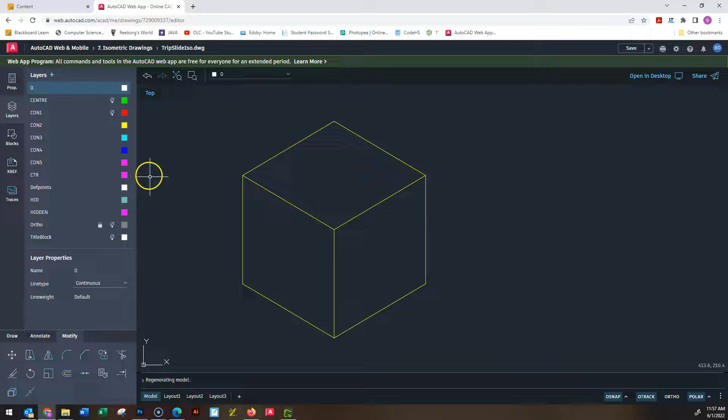I'm going to replicate my object right now in white. Actually, I want to keep that yellow box. I'm thinking on the fly here. I'm going to draw a cube, and my goal is going to be to round all the corners of this cube, so maybe it just looks like a six-sided die or something with rounded corners instead of sharp corners.

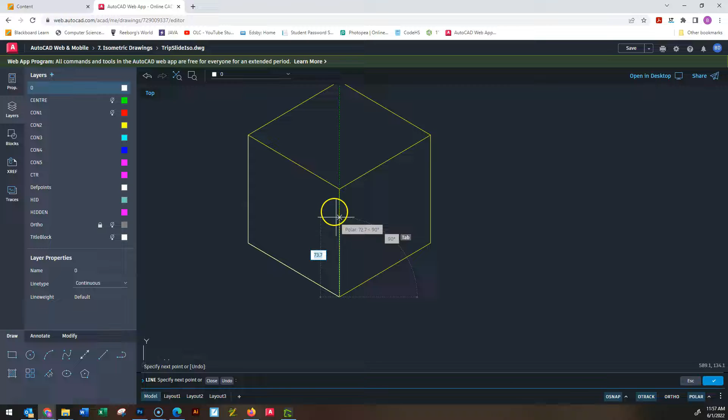Okay, so I'm just going to trace all these in white. Everything behind there is going to be hidden. I may decide to draw some construction lines back here to help me, but I'm not sure if I need them yet. Okay, so let's look.

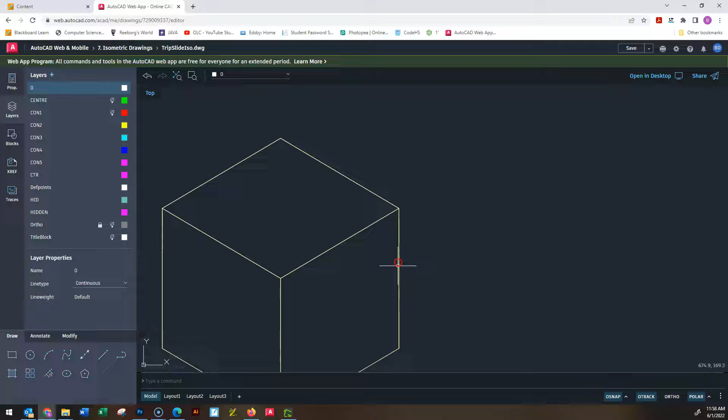Now we're going to be rounding corners. These are 100, I'm just picking randomly. I'm going to put a 20 radius fillet. Your fillets are going to be in radii because they are not full circles, so that is an important distinction. I'm going to go 20R fillets because that's the way you would see them on the drawing. Or, sometimes they're called rounds, but fillets is the proper term.

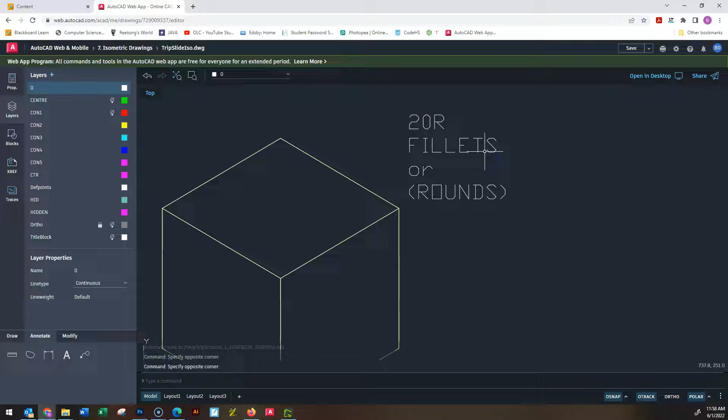And I'll just put 10. See how big that lettering is. Okay, so I'm just writing this to demonstrate that this is going to be a 20 radius fillet.

Okay, so let's get to work here. We know we're going to need isometric circles. I also know instead of just the top one, I'm going to need these two as well. So I'm going to go to my blocks and bring out this isometric circle.

So I'm going to insert here. Okay, I'm going to insert that there. And then I'm also going to make a couple copies and rotate them because I know I'm going to need them. So I'm going to CO copy from the center of this object down, one there, one there.

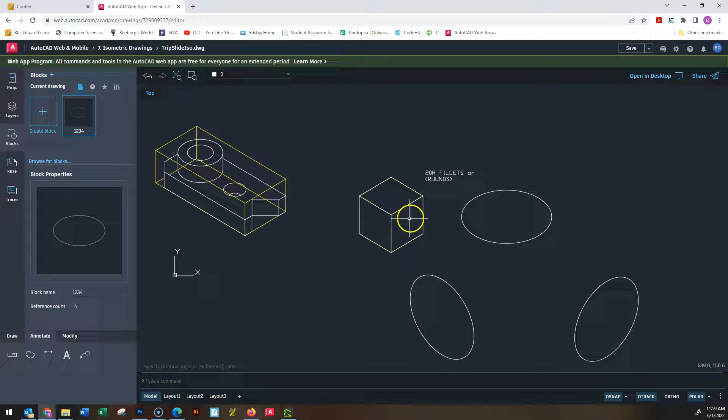So I've got top, left face, right face, and I'm going to need them all for this because I'm rounding every single edge.

All right, now how do we do fillets? Fillets are actually a little easier than scaling for circles. There's a couple of little tricks you can do. Whenever you're filleting a corner, what you want to do is look at what the radius of the fillet is supposed to be, and you want to make a center point somewhere about here that you're going to use for your fillet.

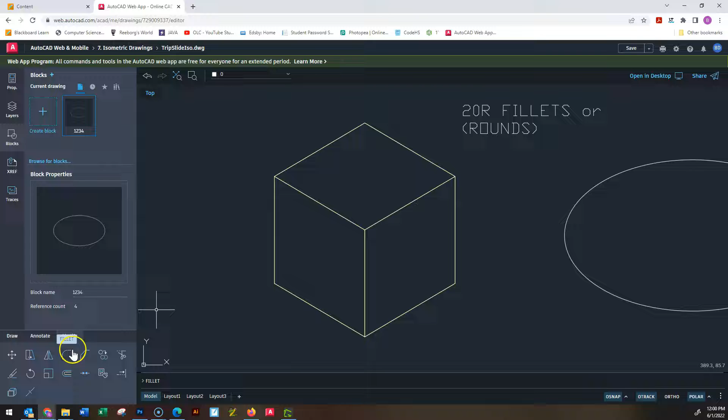You cannot use the fillet tool. So in Modify, we've been using the fillet tool, but you cannot use that for isometrics. That only works in orthographics. It'll fillet it, but it will not be the correct fillet. So make sure that you're using isometric circles or ellipses.

So our 20R fillets, let's draw some of these guidelines to help us out. I'll do them in light blue, actually purple, really easy to see. So I'm just going to go to my draw tool. If it's a 20R fillet, that means from each corner you just go along the line 20.

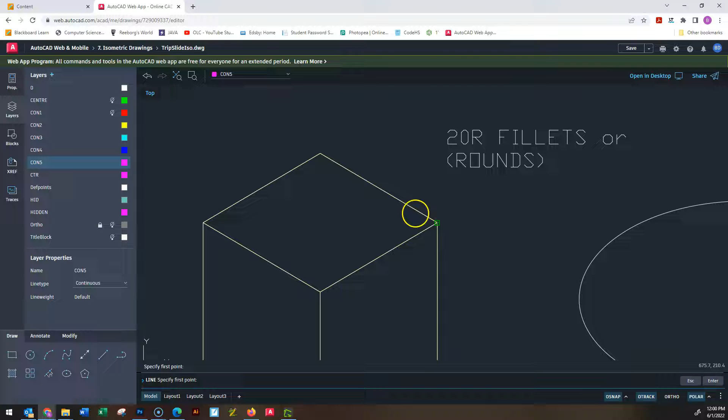And then, this is easy because it's just at a 30-degree angle, and then 20 back this way. That will give you the center point for this particular fillet, and you can do that at every corner. So that is 20, 20 this way, just making sure that you're on those 30-degree angles.

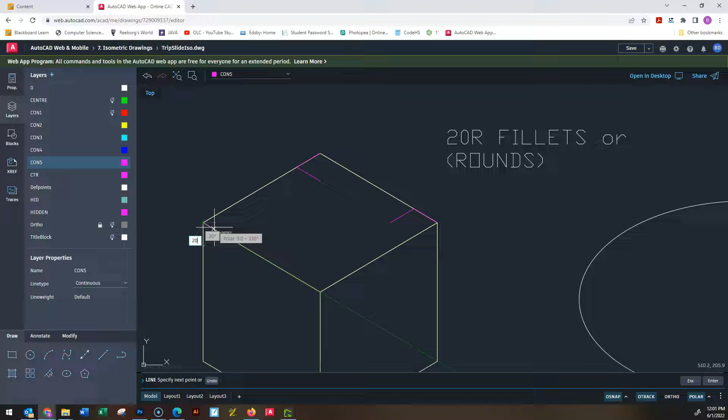Okay, and now that I've done this a couple times, one more maybe. Do this one, 20 this way. Get that corner right there, 20. Okay, and after you've done a couple, you can start copying them down and whatnot. I can actually copy this one, CO from this corner.

And, no, actually, it doesn't help me. I don't know what I was thinking there. So that line. Just look at the other ones. 20 and 20. All right.

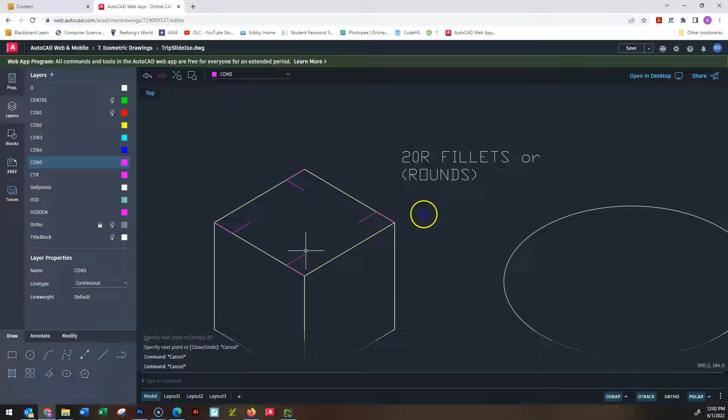Now that I have drawn one on every corner, I can actually hold down the Shift key, click, click, click, grab them all at once. This will save you time. Grab them all, because they're going to match up at the bottom, right? So grab these. Then I'll just copy them.

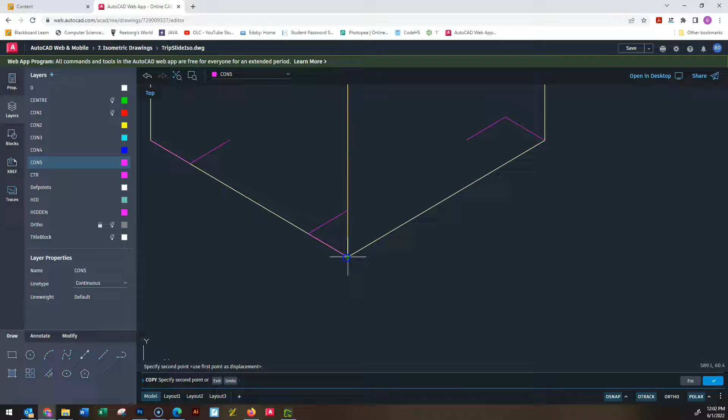CO. And just make sure you grab a good point. That corner will be nice. And then copy them straight down. And then you got the bottom ones as well, right? So the end of those purple lines represent where that round is going to start. It's going to start here, and it's going to end up in the same spot over there.

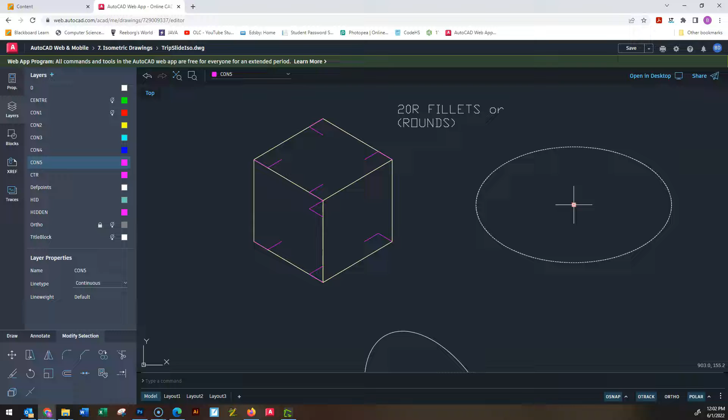Okay, now how do we do this? I believe you could still do it the easy way with copy and just dragging. So what I'm going to do here is I'm going to take my isometric circle, and instead of scaling it, I'm going to copy it from the center, and I'm going to place that here. Okay, way too big, right? Clearly way too big. Okay, now here's how we can make a shortcut though.

If I grab my circle and now I scale it, so SC scale, I can scale it from this point, and then look what happens when I go out to, okay, now what was this supposed to be, 20, right? So oh, maybe it won't. I was really hoping it would snap there, so I guess it's not perfect. Yeah. Because where I need it is right there, but you can't ever guess, right? You can never guess when you're doing drafting.

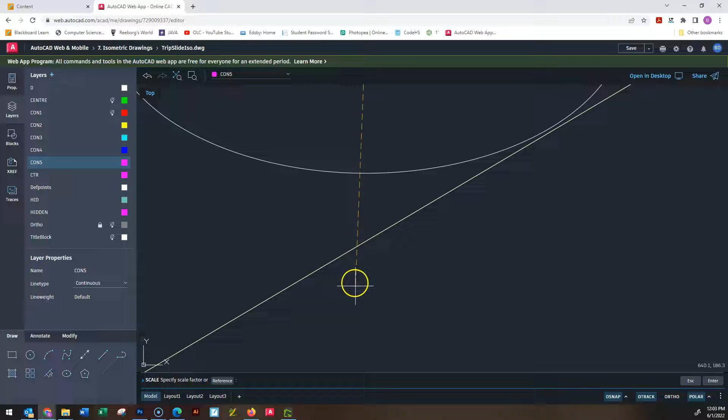Okay. Oh, that looks like it's touching, but when you zoom in, it won't be touching. It'll be close, but there'll still be a little gap in there, and you can get closer and closer, but really you're still just guessing. But luckily enough, I do know exactly what the radius of this is. The radius of this is 20. So from that center point, you still need that center point. So you still need to draw those purple lines. However, from that center point, I need to scale this version.

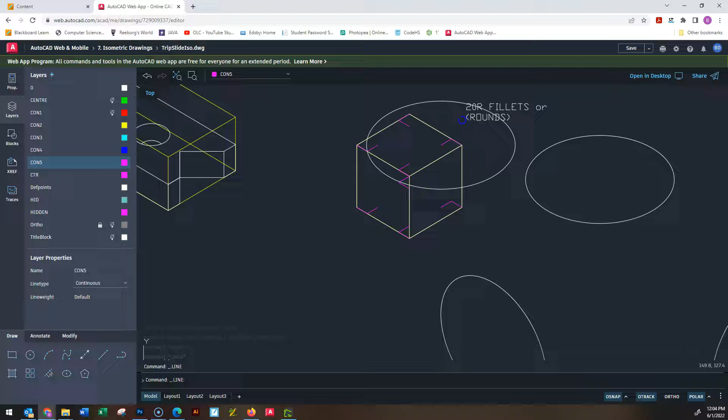The original was, I got to guess now, was the original 100 in diameter or 100 in radius? I believe it was 100 in radius. Let me just measure it quick. From the center point of this, it needs to be 100 in any 30-degree angle. It is 100. So this needs to be 20. So 20% of 100, right?

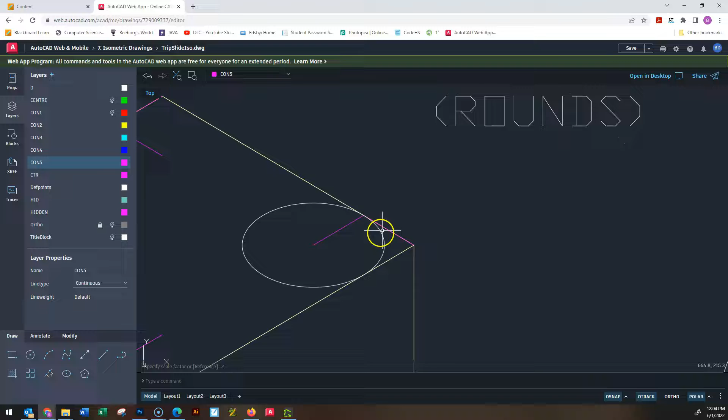0.2. So I'll grab this, I'll scale it after it's already in place, and then I just got to make sure that I'm at a 30-degree angle, and then I need to type decimal 2 because that's 20%. Okay, so decimal 2, there we go, and look, perfect. Once you've got that one, because all of the rounds and all the fillets are 20, you don't need to actually make any more because you can just take this and go copy, and then copy it there. Look at that. It's going to work.

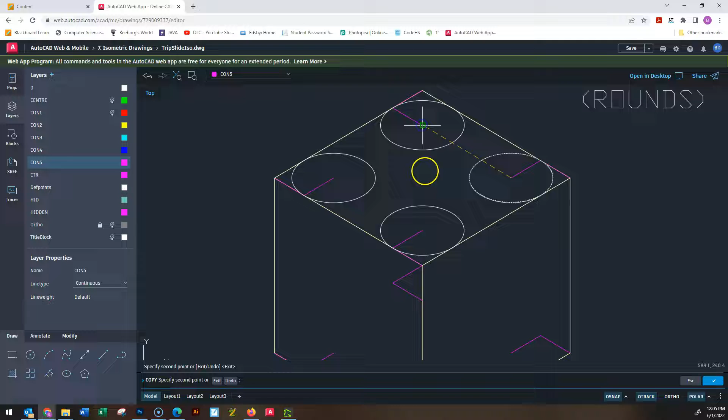Anything that's got that top face is going to work perfectly, as long as you've got the center points. There you go. And you can do the bottom too. It will match up perfectly with any of these corners. Now I didn't draw the back one because that's hidden, but I do have it up top there. Okay, so that's great. Now that will give us the round for this section. Let's just say that I'm not going to do this round. No, let's do that round too.

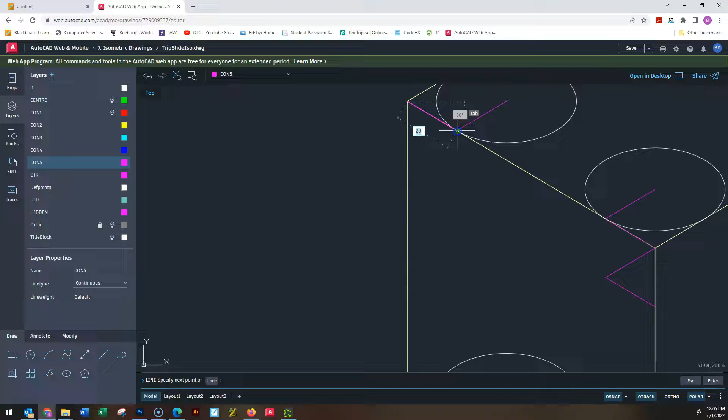Okay, so that's this round then, right? But the same principle applies. It's 20. So if I'm going to draw the lines for, let's say, this face, same principle. I need to go down 20 along that vertical line or horizontal or this line. It doesn't matter. I can go to there because I've already got that point. I know this intersection right here is 20 in already, so I just need to go down 20.

Okay, and then I can copy that. CO, because that's going to be the exact same as this corner. Right? It should match up with that box down there. And then I'll just copy it from the bottom here. CO from the bottom this time because I needed to go up 20 from here. There we go. And up 20 from here.

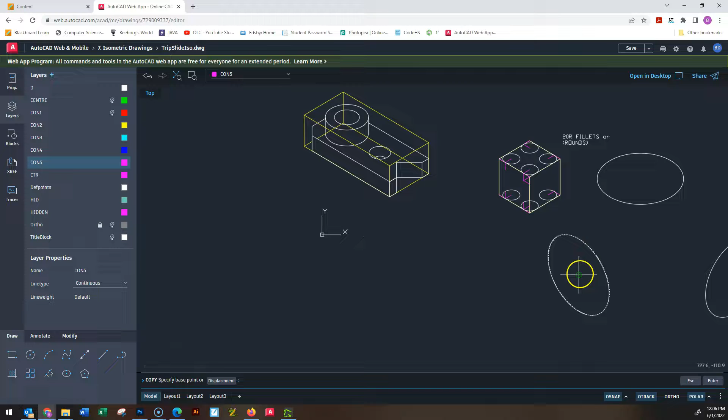Okay, so let's take a look at this left face. That would be this isometric circle, exact same process. So let's make a copy of it. So CO. I'm going to put it there. Okay, now I know I need to scale this to 20%, so I'm going to select that. Scale it, SC. Where do I want to scale it from? I want to scale it from the center. And how big do I want to make it? Decimal 2. 20% as big. Okay, so now we've got the one that sits on this side.

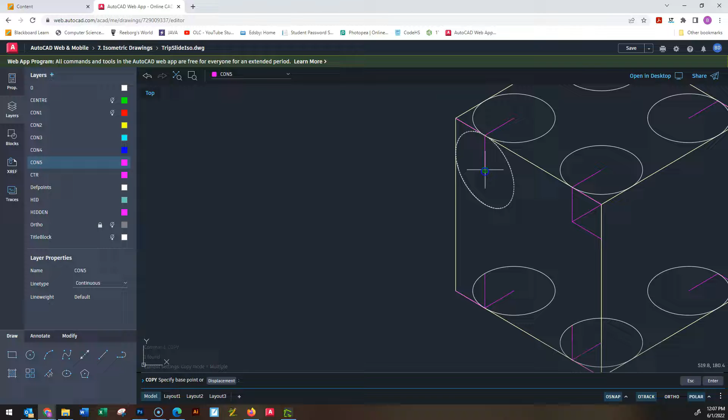Now I can copy that one. So copy to there, and to there, and to there. Okay, now I've got the places that I'm going to round here, and we might as well do this last face while we're at it. So once again, 20. 20. Well, I know it's where this circle hits, so I can just find that intersection point. Go up 20.

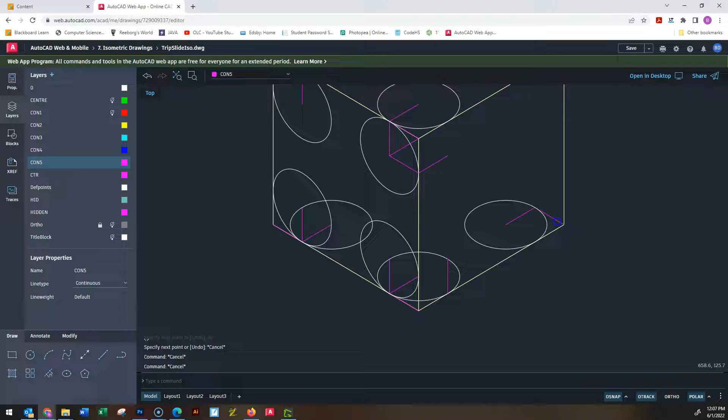It's going to be in the exact same spot as this one right there. And then this one needs to go down 20, and then I should have all the circles. Okay, it looks a little weird right now, but it'll make sense in a second.

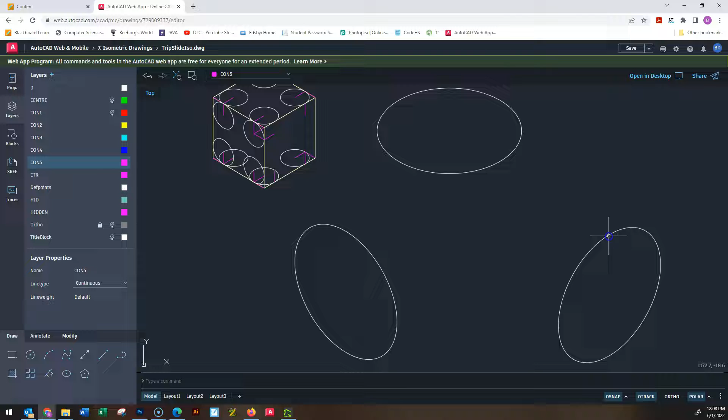Okay, so now I've got to grab the one that fits on this right face. So copy that, CO, grab it from the middle, put it on any one of these midpoints, yeah, center midpoints, isometric center midpoints. Grab it, scale it, SC, scale it from the center, and then it was 0.2, make it 20% of the size that it started at.

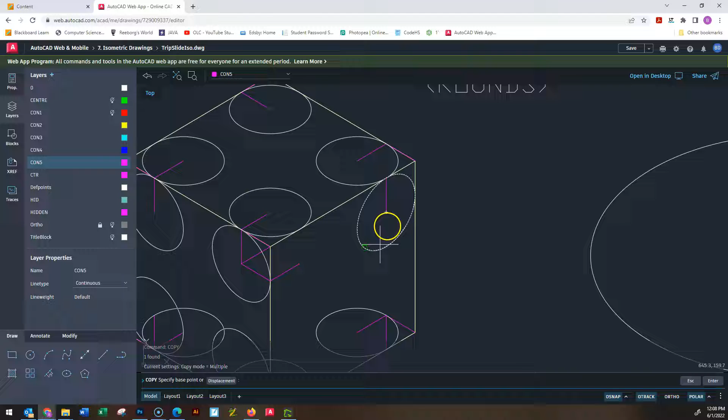And then once you've done that, you can go copy. And paste, paste, paste. Okay, so it looks wonky, but all our circles are actually in the right place, and we can start trimming. So what do we trim? Well, these corners are going to disappear because this object is rounded, right? So what we need to do is we need to make liberal use of our trim tool now.

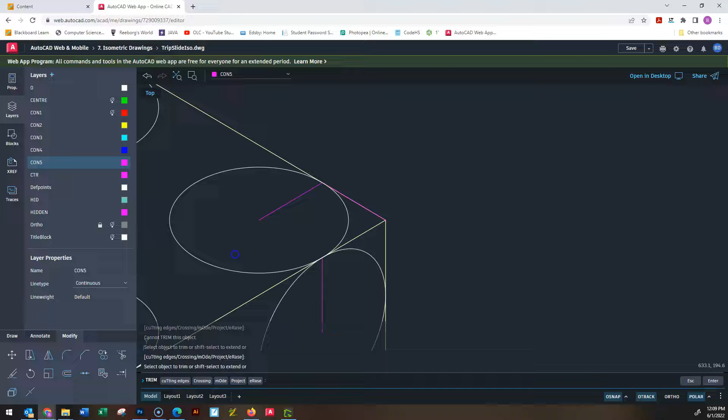This is inside the object. We don't need anything there. That's gone. Oh, forgot one important thing that I should have done at the beginning before I started copying. It's not going to hurt us too much. I just need to grab every single circle that I drew, holding down the shift key. If you do this with the very first one before you copy it, then you don't have to do this step.

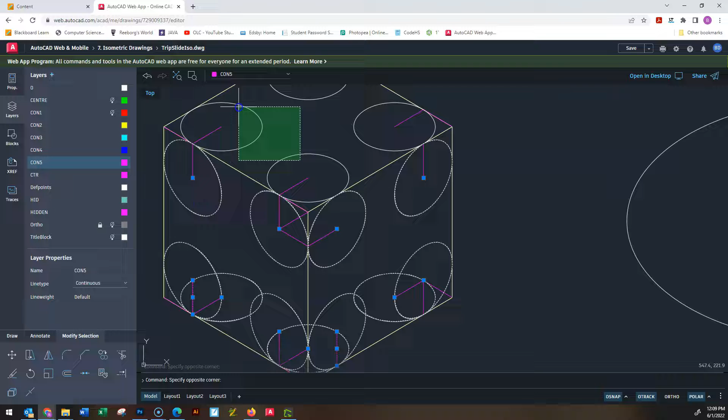And the mistake I made is I forgot to explode them, so I can't trim anything until I explode all of these blocks. So now I've got them all selected, go down to my explode tool. Now they're all exploded. Oh, it says we're not able to explode. That's weird. But that looks exploded to me. I might have accidentally grabbed a line that you can't explode, but it looks like all of these have been exploded. You can tell because now they've got a center and they've also got these 4 marks on the circumference.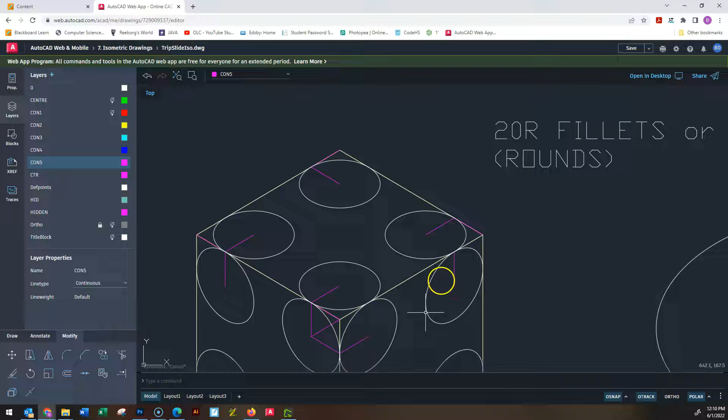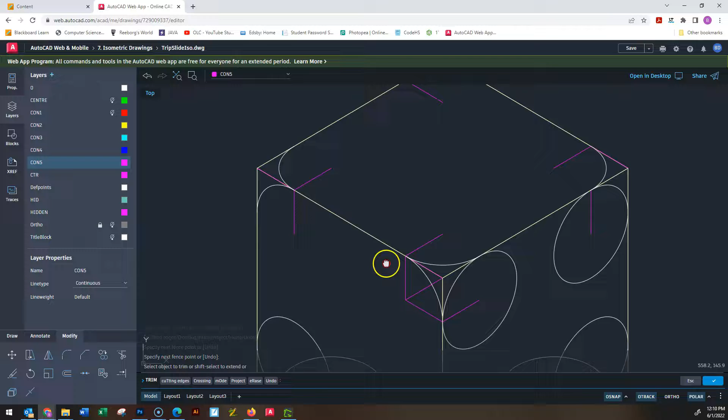Okay, so let's make liberal use of that trim tool. What are we trimming? Anything that looks like it's not going to be part of the object. So that's got to go, that's got to go, that's got to go, that's got to go. Okay, but you're leaving the rounded sections, right? So what it's doing is it's trimming every part that it sees between where it intersects here and where it intersects there, which is good. That's what we want. So I want to get rid of those 2. And we want to get rid of these, all those, this. Don't need any of these lines anymore.

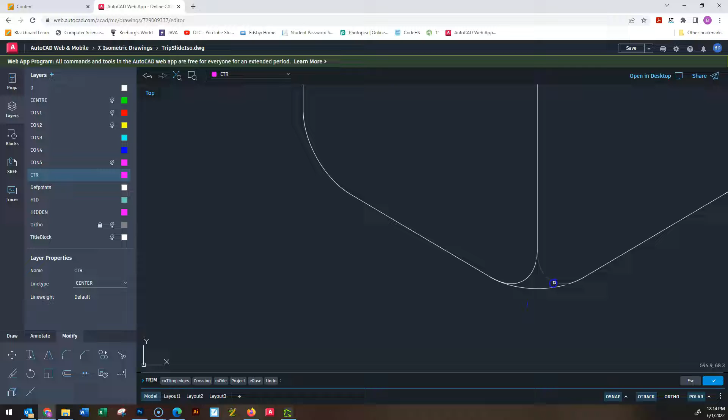Okay, so just this part right here, it looks a bit weird as a shape, but you just got to imagine that it was a corner, and maybe you just took sandpaper, or you took this to a belt sander and just sanded off the corner. It would have sort of that rounded shape in more than one direction.

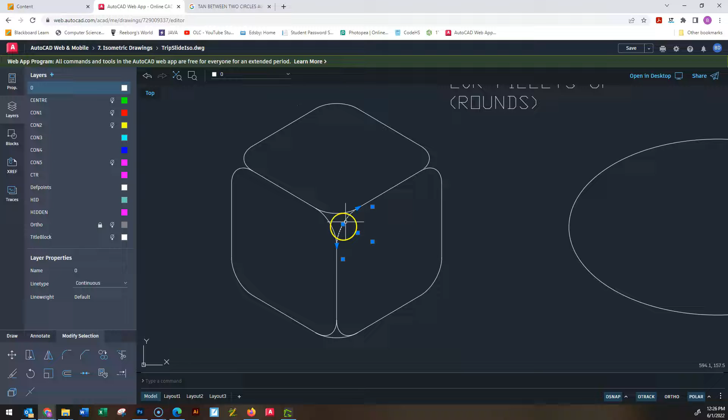Okay, so the last thing we have to do on this is we got to kind of fill in these corners here because it just looks weird. It looks like there's a piece of plywood standing up there, and then another one on the top, and then there's a gap of air, but there isn't. So when you're filling in gaps on objects that kind of look like this, what you might want to do is just grab a corner that you know is perfect, it has perfect isometric measurement, and then just bring it back up there, and it'll perfectly fill that gap and be mathematically accurate.

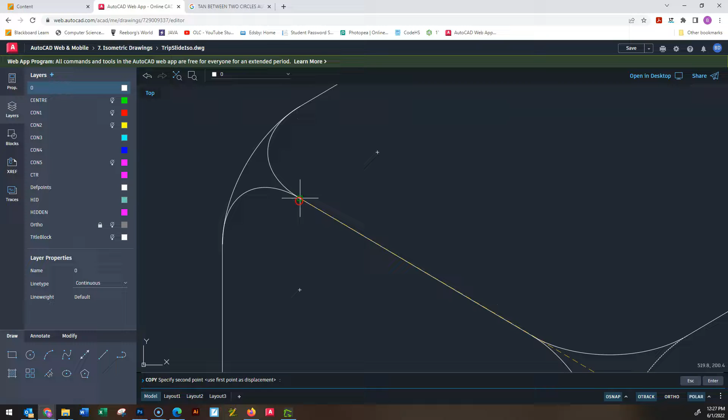So if I copy this existing curve, just make sure you take the right curve from the right face, because remember, we're looking at what would the back face curve look like, the one that's hidden. It's going to be the same angle as this one, right? So let's take this, and if there were a back to this object, you can just see the very corner of it, and once you get it to that same point, I mean, this is just the vertical point from

the center, right? Straight up, and then right there, then you can see that is the very back corner, and then the gap is where it's been sanded off, and then you got to do the same thing with this one right here, and you just got to grab the opposing curve, copy that, and bring that back.

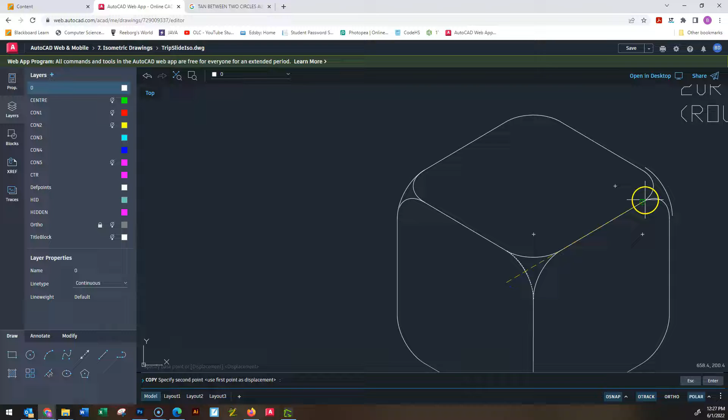Now you have an isometric representation of, say, a die or something like that. I could put 3 isometric circles. It could be the 3 of the die, and also all the corners around it. And these ones are sort of double rounded because they're rounded on the top section and they're rounded on the bottom.

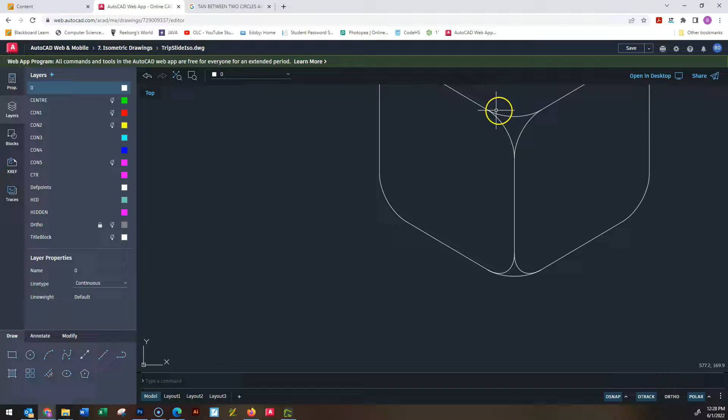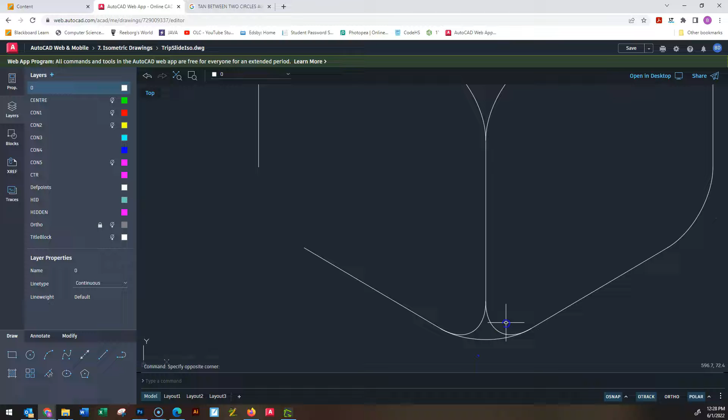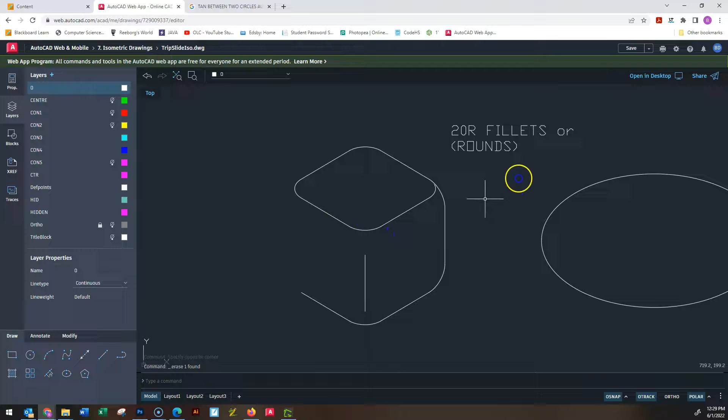Just a quick idea of what that might look like if you didn't do these top rounds. If you just wanted it rounded, say on 2 faces, on the top and the bottom, then it would look a little different. It would look something like this. Just get rid of these ones. I've just basically got to fix the corners. You'll see what I'm getting at here pretty quickly. Okay, so this would be the rounded edge, and rounded edge, and then this one, rounded edge as well.

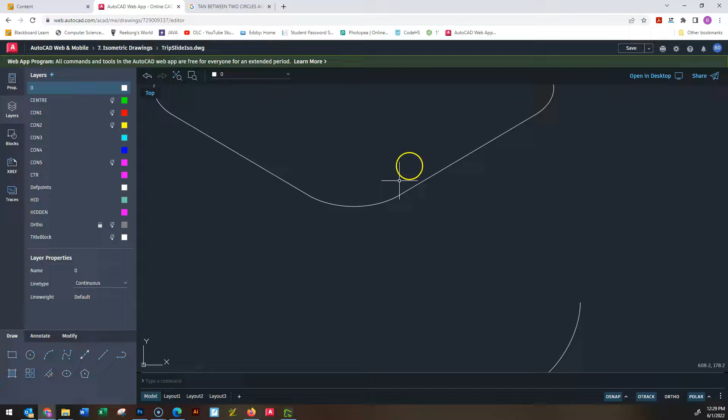So basically we want a shape like this, sort of rounded only on the top face, and then these other 2 faces aren't going to be rounded. Now all I'm going to do is join up the lines. When you are representing a rounded corner, or filleted corner, this is where you're going to use an angle. So you go from the center point of that round, and then it is 30 degrees, so 150, 180 minus 30, to there, and then straight down.

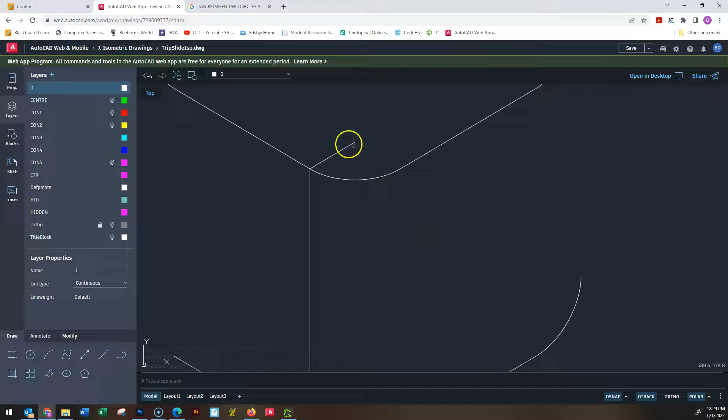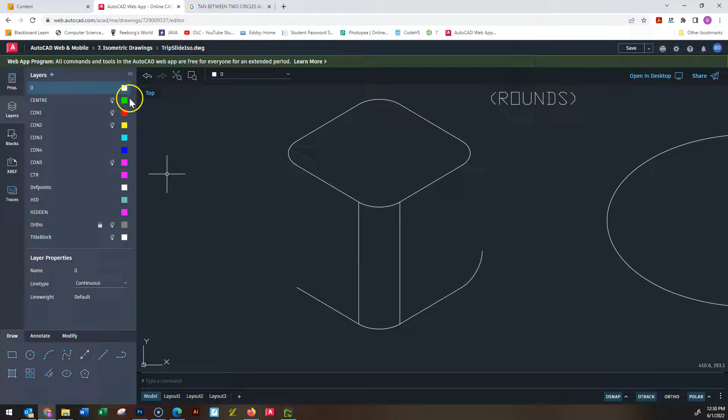And so you're going to see the same thing from here. You've got that same 30-degree angle, and then right down to where you hit the ground, should be vertical. And that just sort of accentuates for the user that it is actually a curved section. It looks a little weird if you don't include these lines. And then this would be the same process. You'll notice that the actual bend of these ones is different than the bends of the ones on the top and the bottom. That's just part of the way isometrics work. They look different based on different perspectives, but here we do the same thing.

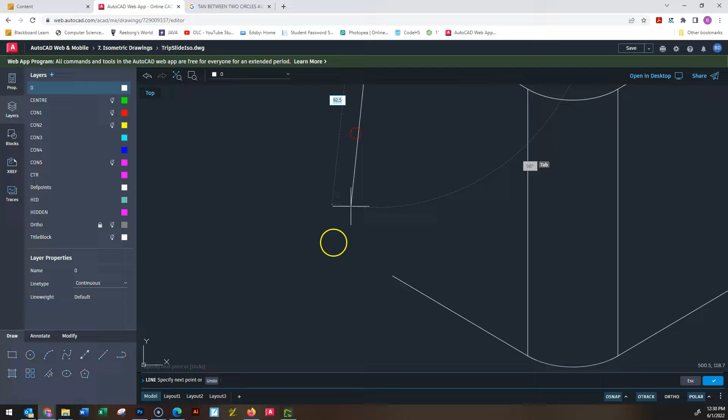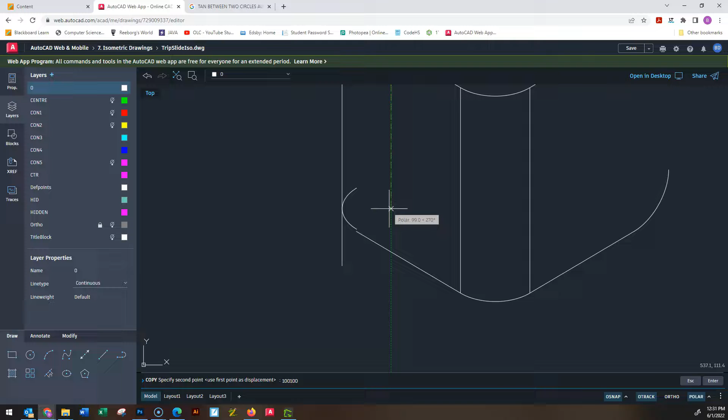So we're going to take our 150. Nope, that's a lie. We are going to go straight out on this one, straight out on those smaller ones, and then straight down. And it's going to match up with, I deleted that corner for some reason, I'm not sure why. But when I grab this isometric and copy it straight down, it'll be back where it was before. My height of my object was 100. There we go. So that's where it was.

Just trim this line. And you'll know when you get it. It'll just look right. Boom. Now, obviously, this little area would be on the inside of the object now, so you've got to trim that out. That's what you can see from the outside. This needs to be trimmed as well. And now I can do the same thing on the other side, but because the shapes are all the same, just the opposite direction, this might be a handy place to use that mirror tool.

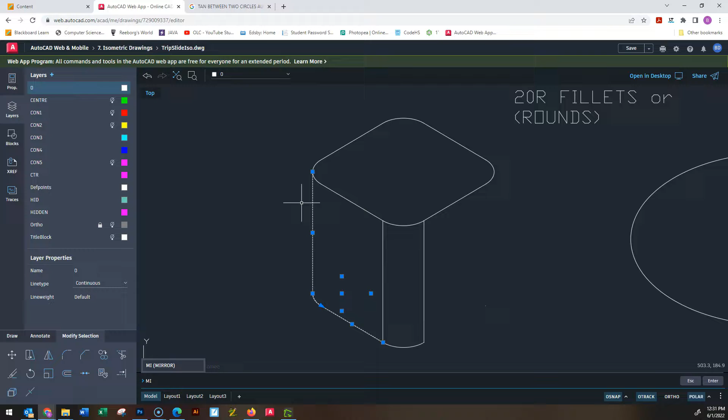So I'm just going to go grab these lines. And then I'm going to MI for mirror, and I'm going to draw a line right dead center. That's where I'm going to mirror around, and look at that. Everything should line up perfectly in here. So it does. And now you kind of get the idea, right? This is maybe an ottoman or a tabletop or something like that. It's filleted on the top, but it still goes straight down. There's no corners sanded off or anything.

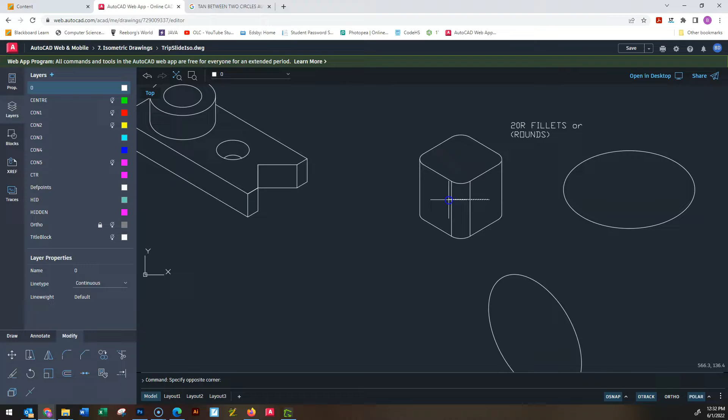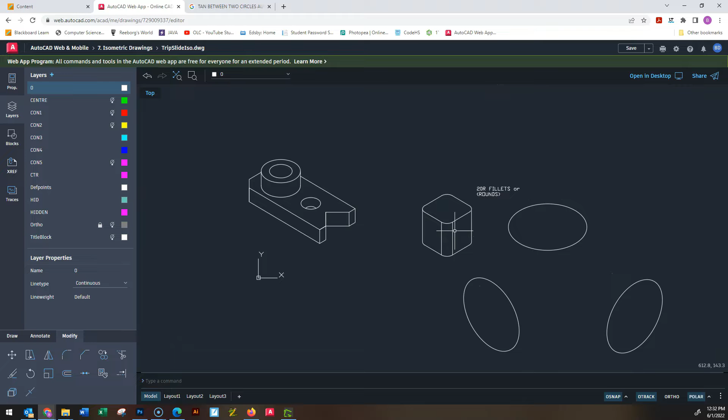And again, I normally include those 2 verticals, because I just think it looks a little bit weird when you don't have them. It's not bad, it's not wrong, but I just think it gives the viewer a slightly better curved impression of this thing when you have those. That one's sort of up to personal preference. I'm okay if you leave those off. But do make sure that the lines on the outside are lined up appropriately. That is a big deal.

There you go. So you should have enough information to do anything with a circle, a round, a fillet, a countersink, a counterbore in isometric.